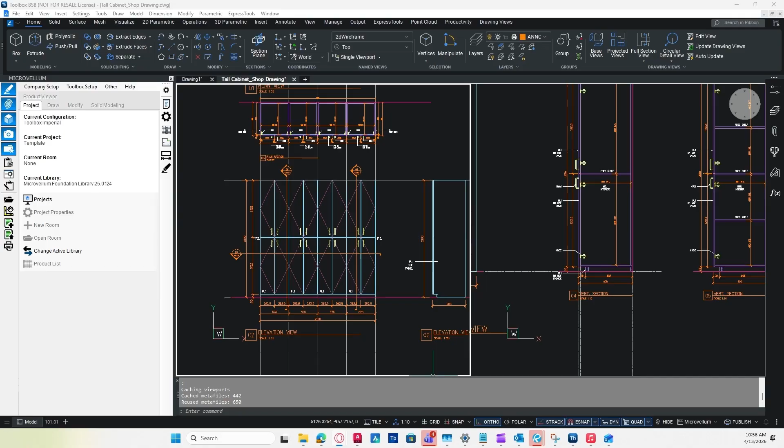If you work with Microvellum, you already know that a lot of time can go into things that are not really drafting, like setting up pages, organizing drawings, filling title blocks, keeping everything consistent from one sheet to the next. That setup work can take a lot of time before the real drafting even starts.

That is exactly why we created the Duckworks Microvellum Template. This is not just a few sample files. It is a complete CAD template package built to help you work faster, reduce manual work, and create cleaner, more consistent drawing sets. Instead of starting every project from zero, you start with a system that is already organized and ready to use.

When you get a template, you receive a complete package. That includes a cover template, a key plan template, a room template, an Excel file for schedules, CTB files, a Microvellum import file, font files, and a setup guide.

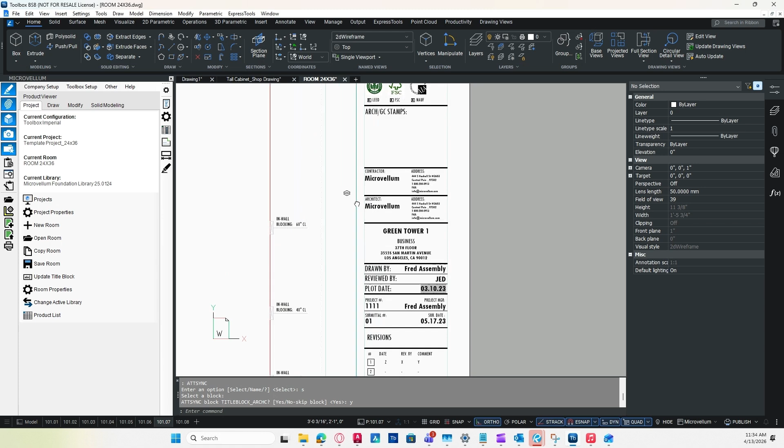One of the biggest advantages of this template is title block automation. The system is built around Microvellum user-defined project properties. So instead of typing the same project information again and again, you enter it in one single place. And that information can update across your drawings automatically. That means less repetitive work, fewer mistakes, and better consistency across the full set.

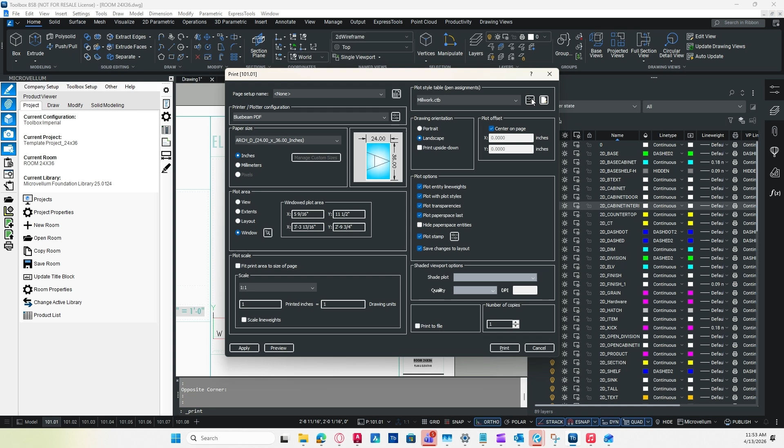Another big advantage is layer organization. The template already includes pre-built layers, predefined colors, and a CTB setup that controls line weights by color. So instead of building your layer system from scratch, you can start with a setup that is already structured for production work. This helps your drawings stay cleaner, easier to read, and easier to plot.

The template also includes pre-built annotation styles. Your text, dimension, leader, table styles, and blocks are already prepared. That means you can spend less time setting up and more time actually drafting.

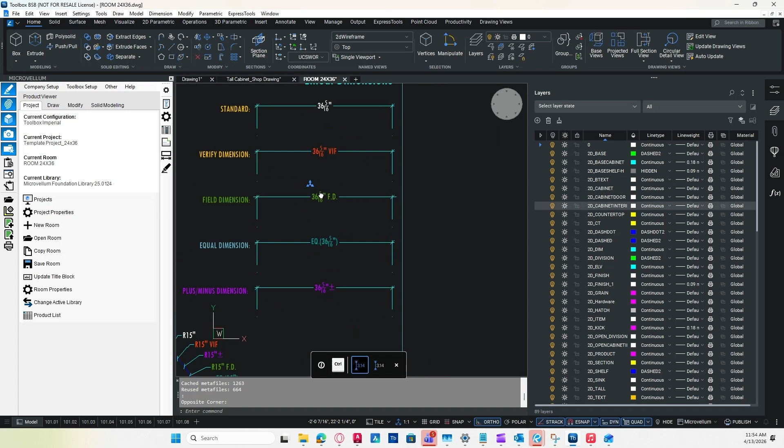And this package is not limited to just one type of page. The cover template can be used for cover pages, index pages, schedules, RFIs, deviations, and typical details. And the room template is designed for your drawing series by room, area, or scope item. So this is not only a title block system, it is a full documentation system.

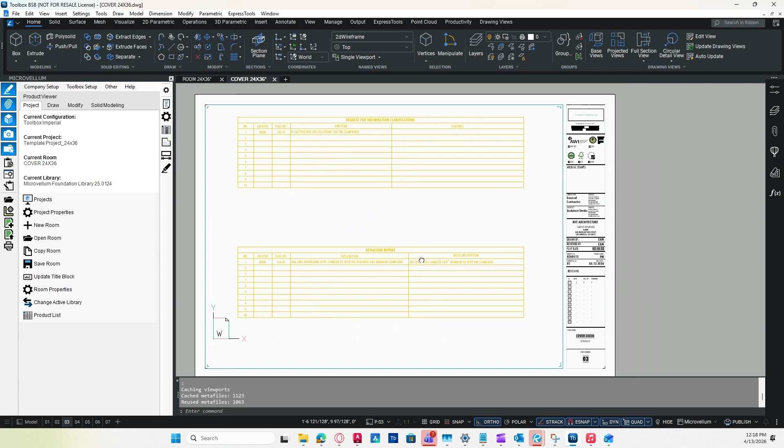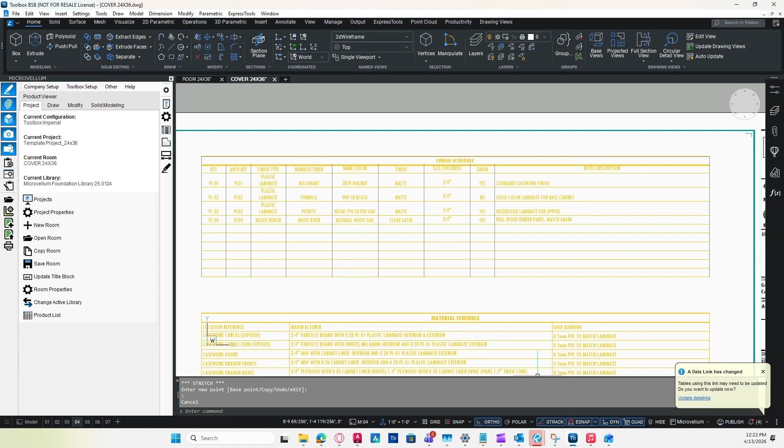Another very useful part of the package is the schedule workflow. The schedules are handled through the included Excel file and linked to AutoCAD through data link. That means that you do not need to maintain those tables manually inside CAD. You can update information from Excel and keep your schedules easier to manage, faster to update, and more consistent across your projects.

As you may know, the new versions of Microvellum now work with Toolbox BricsCAD. Because of that, it's very important to have a template system that can support both environments. And that's exactly what this package is designed for. Whether you're working with the OEM workflow or the new Toolbox BricsCAD, this template is prepared for both. That means you can keep using the same drafting system across both environments with a structure that is already organized and adapted for each one.

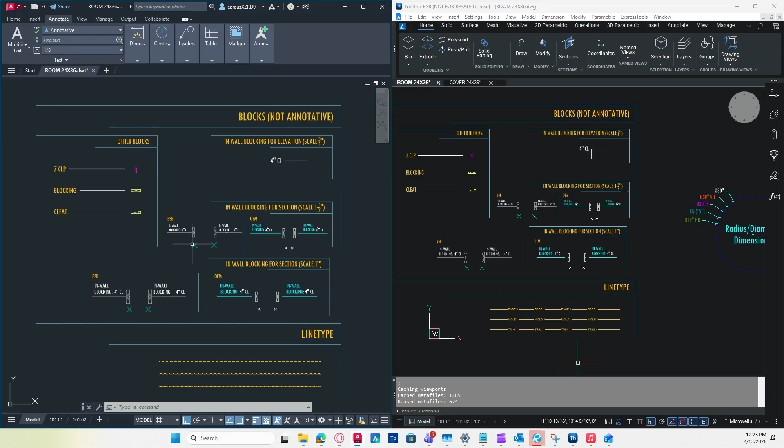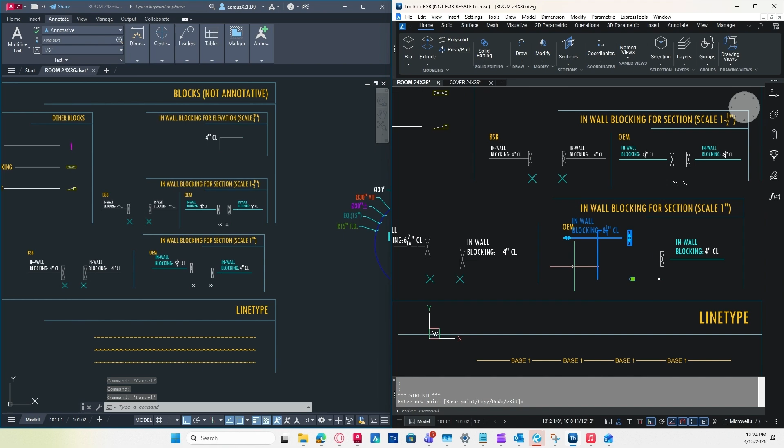This is especially valuable because there are important differences between both platforms. So having a template package designed for both helps you keep consistency, reduce setup time, and work with a more standardized system. If you're still working with OEM, this template works for that. And if you're working with Toolbox BricsCAD, this template is also designed for it. So instead of needing one template for one workflow and another template for the other, you can work with one package built to support both.

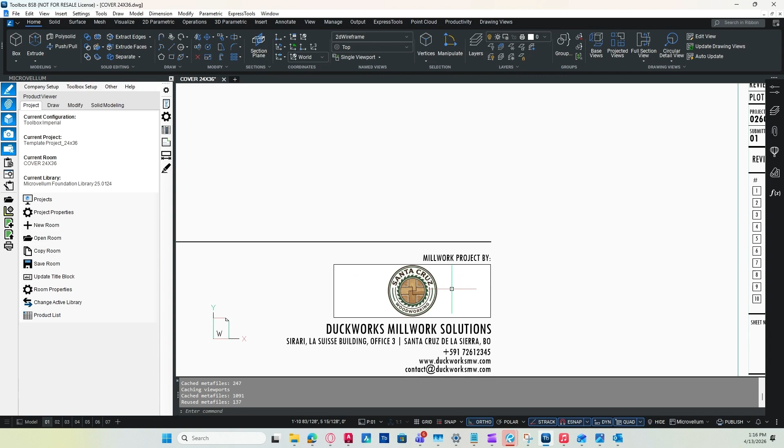Flexibility is another key advantage of our template. You can set your company logo, company information, fonts, and other visual elements to match your own company standards. So while the template is already built to save time, it can still be adjusted to fit your brand and your workflow. It is also available in multiple page sizes, in both imperial or metric formats, so it can adapt to your own project standards.

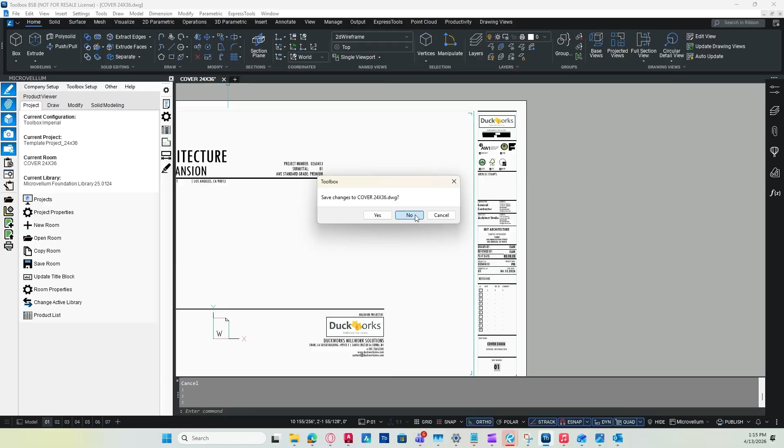So in simple words, what this template gives you is faster project setup, less manual work, better organization, more consistency across drawings, fewer errors from outdated information, and a cleaner, more professional result. So if you are spending too much time setting up files, updating title blocks, fixing inconsistent drawings, or rebuilding standards in AutoCAD, Toolbox BricsCAD or OEM, this template is built to reduce that extra work.

If you want a ready-to-use drafting system that helps you work faster, reduce work, and produce cleaner and more professional documentation, the Duckworks Microvellum Template is built for that.